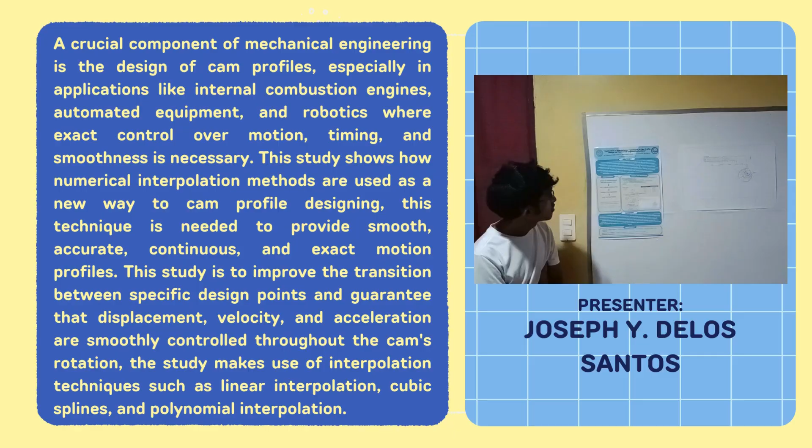Now we're going to discuss the methodology. Define the motion phases and displacement data. Apply linear interpolation. Generate the CAM profile. Plot the CAM profile. The linear interpolation between 2 points is given by the equation f1(x) = f(x0) + (f(x1) - f(x0)) / (x1 - x0) × (x - x0).

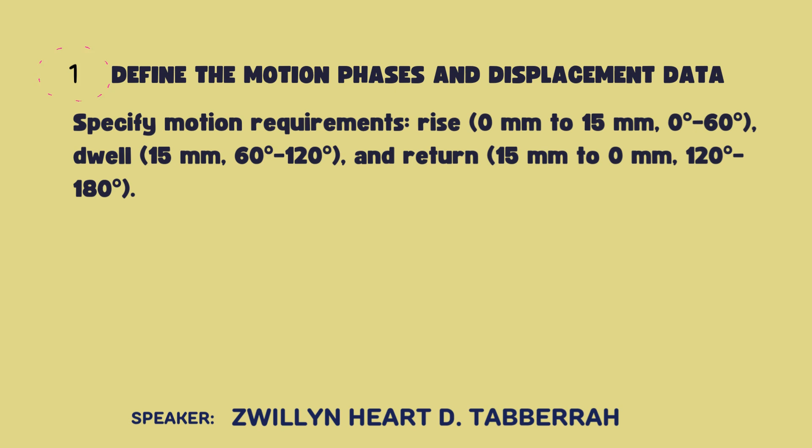For our first methodology, define the motion phases and displacement data. We specify motion requirements. For rise, we have 0 mm to 15 mm from 0 degrees to 60 degrees. For dwell, we have 15 mm from 60 degrees to 120 degrees. And for return, we have 15 mm to 0 mm from 120 degrees to 180 degrees. Our second methodology is applying the interpolation. For this, we use linear interpolation. We wanted smooth motion with continuity in velocity and acceleration.

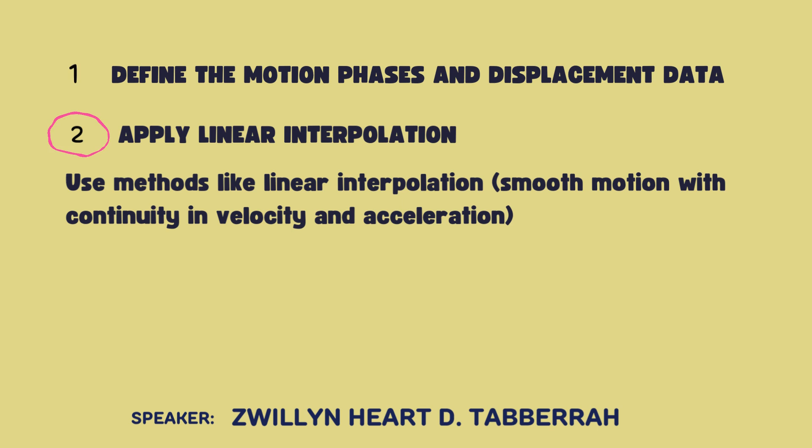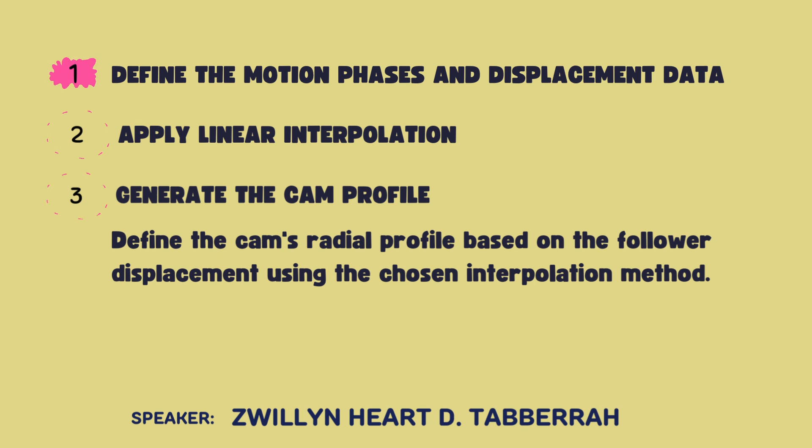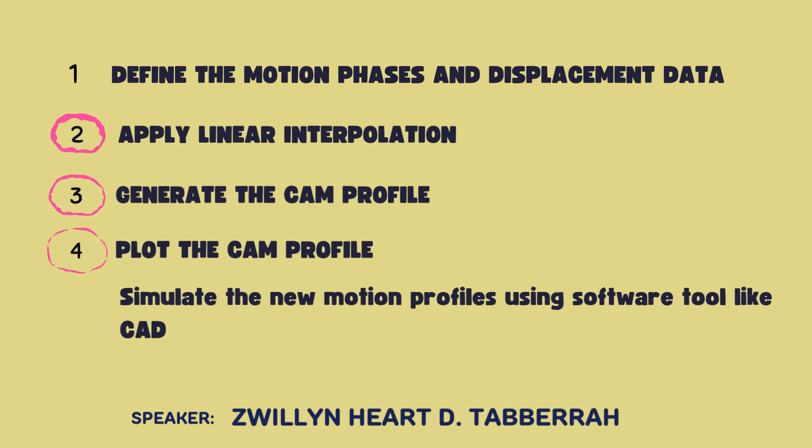The third methodology is generating the CAM profile. Define the CAM's radial profile based on the follower displacement using the chosen interpolation method, which is linear interpolation. For rise and return, it is likely to use advanced interpolation, but we still use the linear interpolation method. For the dwell phase, we maintain a constant displacement value. The last methodology is plotting the CAM profile. For this, we use a software tool like CAD to evaluate displacement, velocity, and acceleration curves. With this, we can analyze the performance of linear interpolation.

Now, the results and discussion. Design a CAM profile for a radial CAM with a flat face follower. The CAM rotates 180 degrees and the follower moves as follows. From 0 degrees to 60, the follower goes from 0 mm to 15 mm. From 60 to 120, the follower remains stationary at 15 mm, the dwell phase.

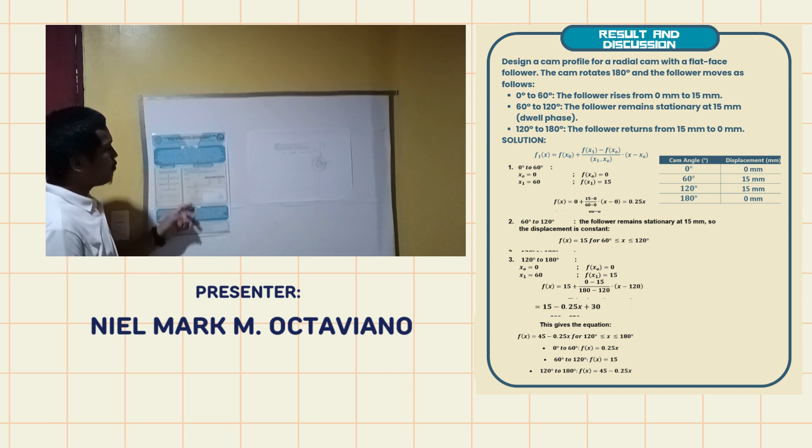Now, using the linear interpolation solution f1(x) = f(x0) + (f(x1) - f(x0)) / (x1 - x0) × (x - x0), we're going to compute the points to find the CAM profile. From 0 to 60 degrees, our x0 is 0 and our x1 is 60. Then f(x0) is equal to 0 and f(x1) is equal to 15.

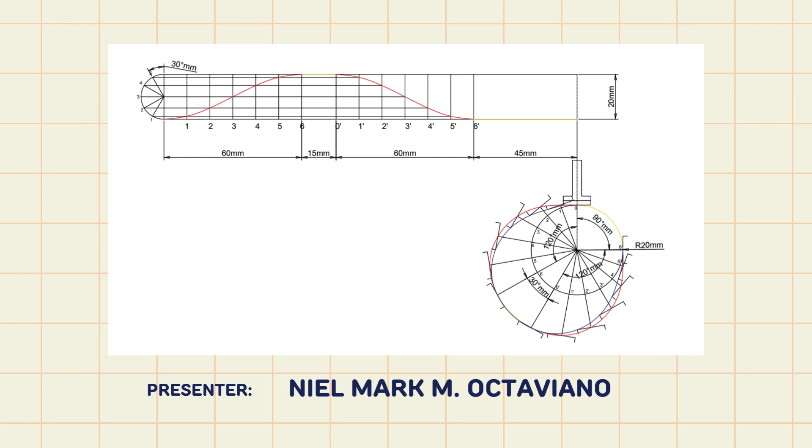Moving on to the discussion, choosing the right interpolation technique really helped with this study. The use of linear interpolation for the rise and return phases ensured smooth transitions. Other interpolation methods such as cubic spline or Fourier techniques could be considered for specific applications requiring even greater precision. We also encountered challenges using flat face followers because this follower can experience excessive contact stress, particularly during sharp profile changes. However, the chosen design effectively minimized sharp edges in the cam profile.

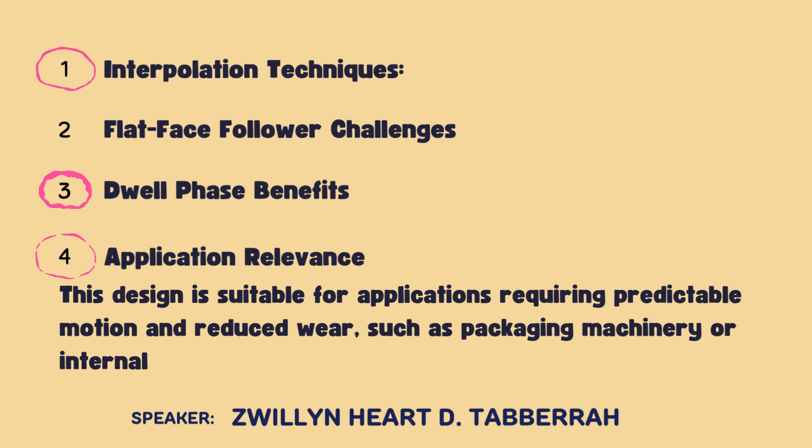We also realized the benefits of the dwell phase. This stationary phase allowed for operational stability and minimized dynamic loads on the system during part of the cam cycle. Our last discussion is application relevance. This design is suitable for applications requiring predictable motion and reduced wear, such as packaging machinery or internal combustion engines.

To summarize the discussion, the designed cam profile effectively met the requirements for smooth motion across the three phases: rise, dwell, and return. The use of linear interpolation for the rise and return ensured continuity in displacement, velocity, and acceleration, minimizing jerk and reducing mechanical stress. The dwell phase, where the follower remained stationary, provided stability and reduced dynamic loads during operation.

While the flat face follower design was suitable for this application, it may lead to higher contact stresses compared to alternatives like roller followers, particularly under high loads. Overall, the interpolation achieved a balance between precision and practicality, making the design suitable for mechanical systems requiring predictable and reliable motion control.

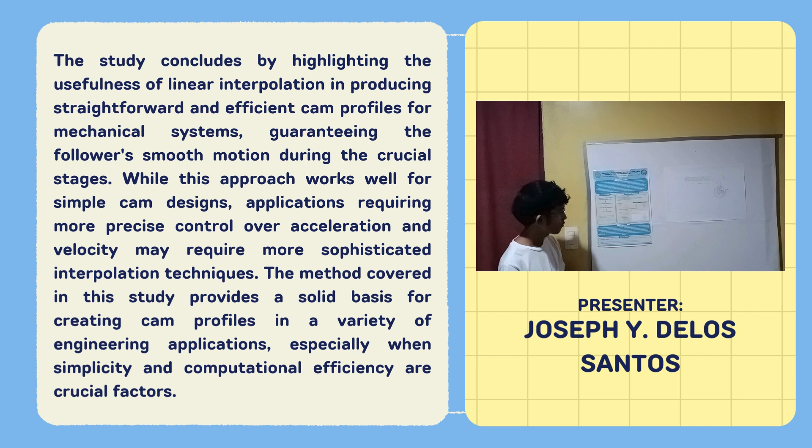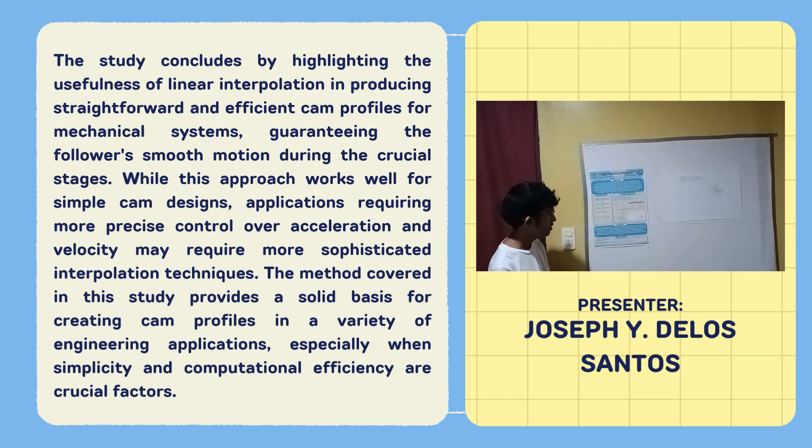This study concludes by highlighting the usefulness of linear interpolation in producing straightforward and efficient cam profiles for mechanical systems, guaranteeing the follower's smooth motion during the crucial stages. While this approach works well for simple cam designs, applications requiring more precise control over acceleration and velocity may require more sophisticated interpolation techniques. The method covered in the study provides a solid basis for creating cam profiles in a variety of engineering applications, especially when simplicity and computational efficiency are crucial factors.